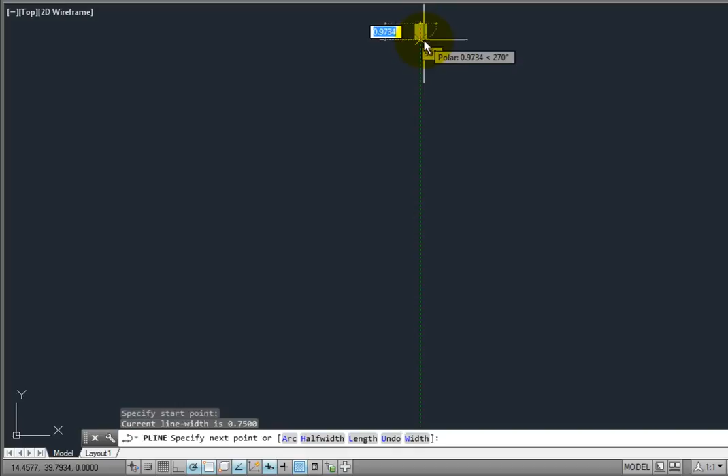I'm going to start by clicking the Polyline button in the Draw panel of the Home ribbon tab. When AutoCAD prompts me for the starting point, I'll pick a point near the top of the screen. Then AutoCAD prompts me for the next point. And notice that in the command window, it shows me the current polyline width, the width I used last when I drew a polyline. This is extremely important. Every time you draw a new polyline, AutoCAD remembers the values you used the last time.

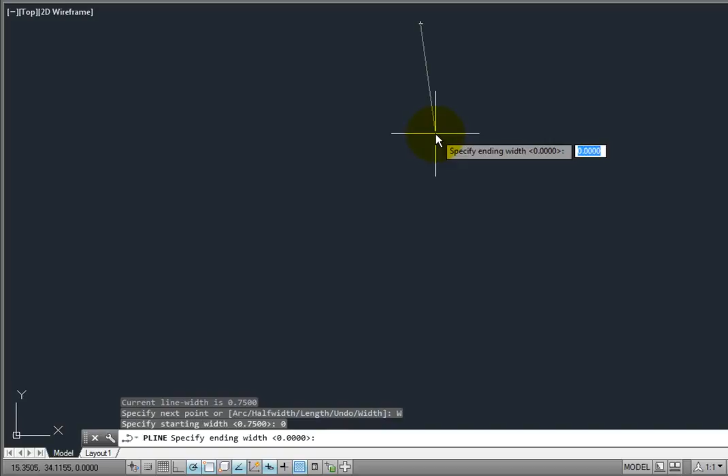In this case, I'll right-click, choose the width option, and set the starting width to 0. Then AutoCAD prompts me for the ending width. And I can either enter a value or click to select 2 points, the width being the distance between those 2 points. In this case, I'll enter a value of 3 and then press Enter. Now, as I move the cursor, notice that the polyline shape looks like an arrow because it expands from a starting width of 0 to an ending width of 3.

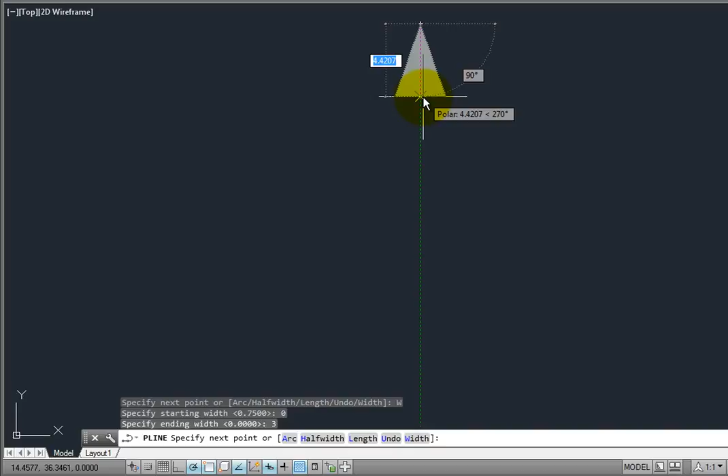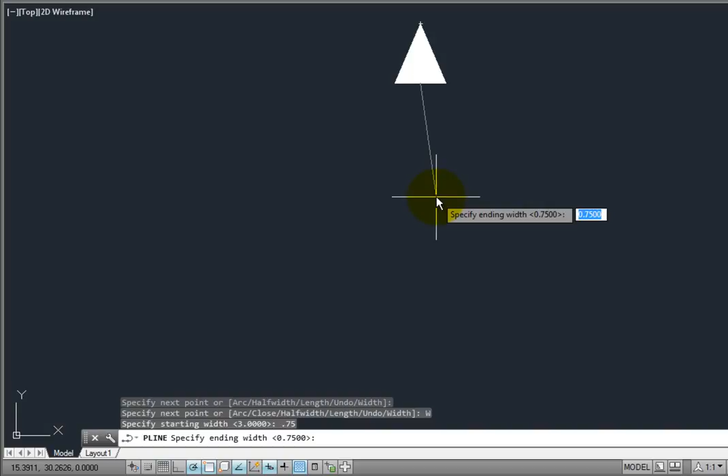I'll click to specify the endpoint of this first polyline segment. AutoCAD now assumes that you want to draw the next polyline segment with the same width as the first segment, but I don't want to do that. So I'll right-click and choose the width option again, and now I'll change the starting width to 0.75 and press Enter. And then I'll press Enter again to use that same width I just entered as the ending width for the next segment. Now I'll specify the next point to draw the next polyline segment.

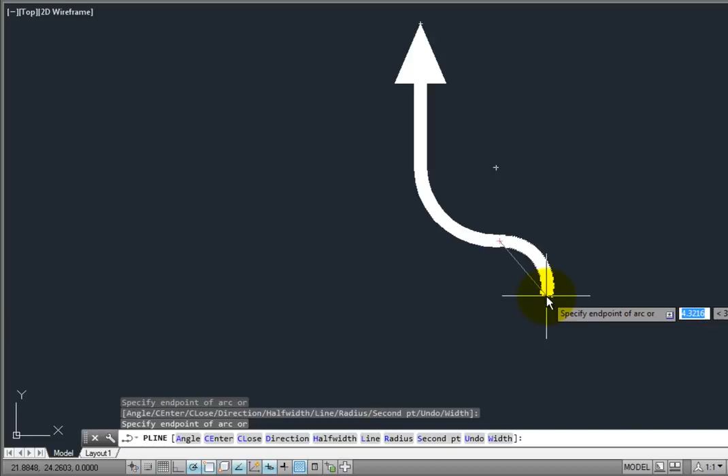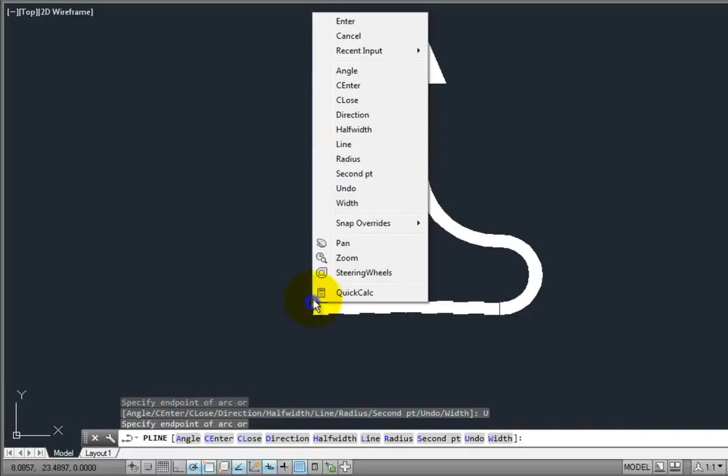If I want to add an arc to the arrow, I can right-click and choose the Arc option and draw an arc segment. So I can always switch from lines to arcs and then back to lines if I wish. And I could also draw a series of arc segments, sort of like what you'd see on a road sign for dangerous curves ahead. And if I don't like that, I can use the Undo option to remove any of those polyline segments. When I'm satisfied with the arrow, I can press Enter to end the polyline command.